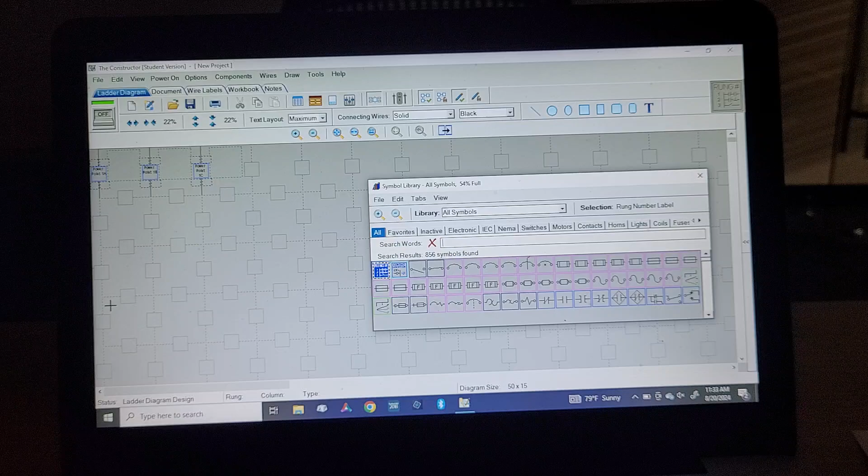All right, I'm gonna try to do this and hold the phone. If I was sophisticated, I'd figure out a way to record this inside the computer, but I don't know if I could get the audio to work, so I'm just gonna do it this way.

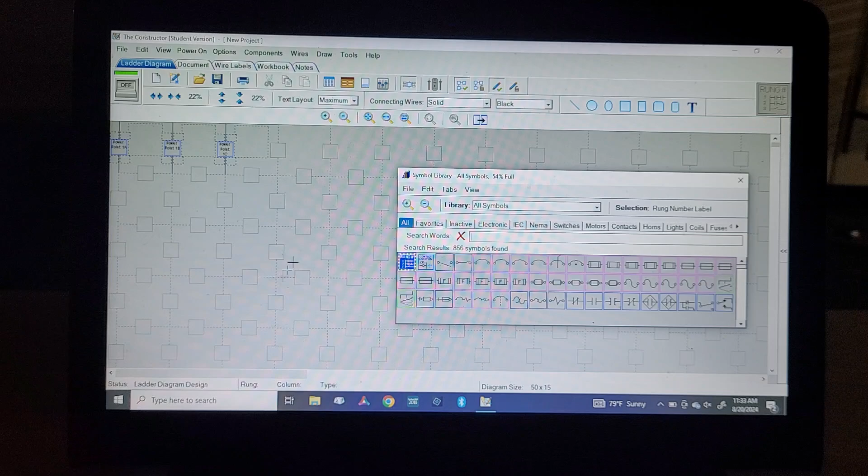But when you start up The Constructor, you get this little work pad here. You get your drop-in symbols, which are basically switches, and you get these little power points here. So if you wanted to, you could make a whole drawing with a transformer and all that good stuff, but I'm not gonna, just for simulating this part.

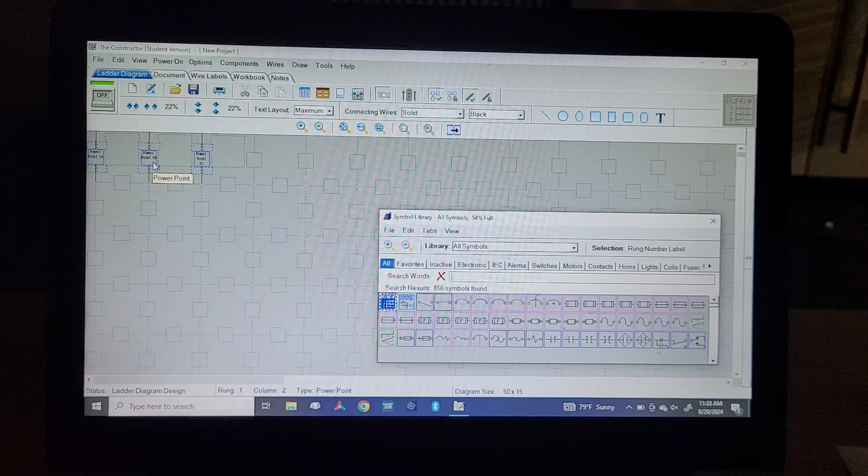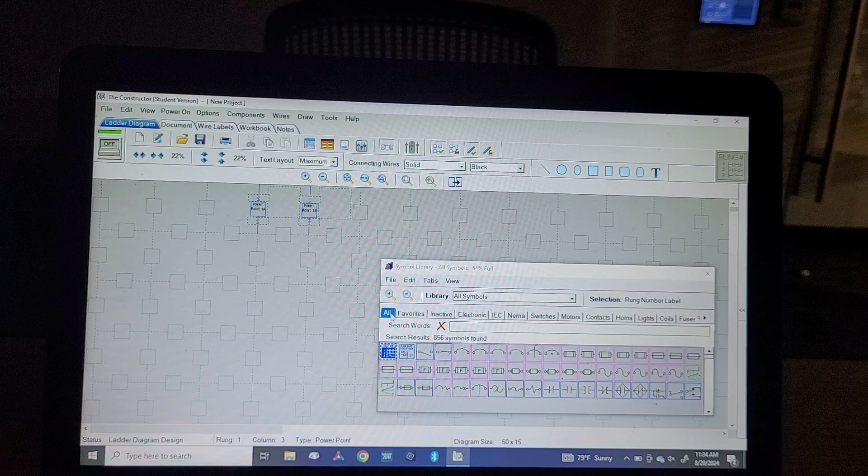So let's go to, where is it, PowerPoints, add single phase 2-wire PowerPoint set. Let's get rid of these. So I got rid of the 3-phase, now I just got 2-phase. So that's hot. I'll put the neutral, drag it over here.

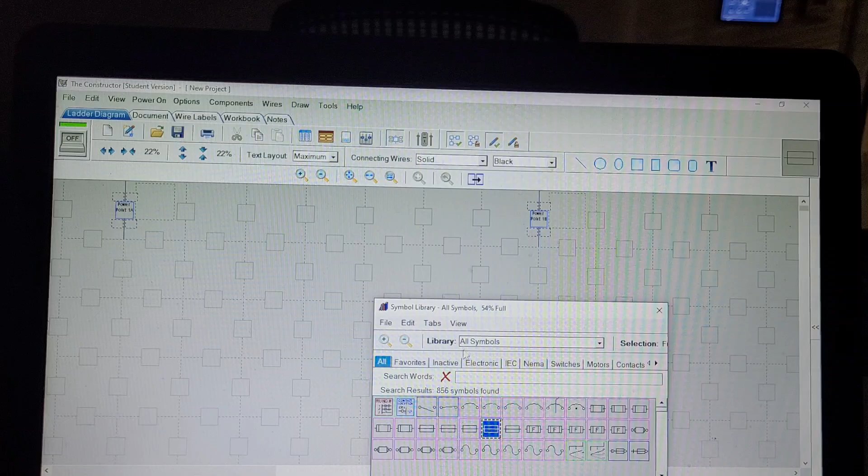So now I want to reproduce that drawing. So we need a normally closed pressure switch. So go in here. Everything that's kind of bluish here is an active switch. They do have inactive switches down here that don't do anything. Like, for instance, here's a diac and an SCR and different things. Triac, that's a MOV.

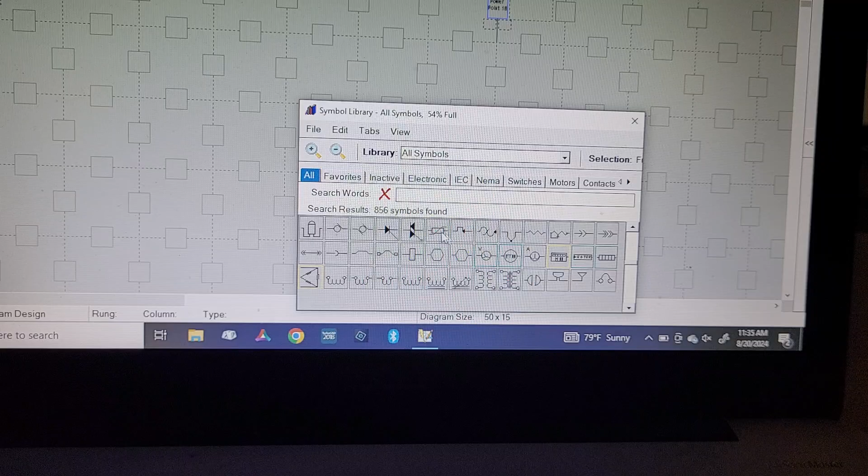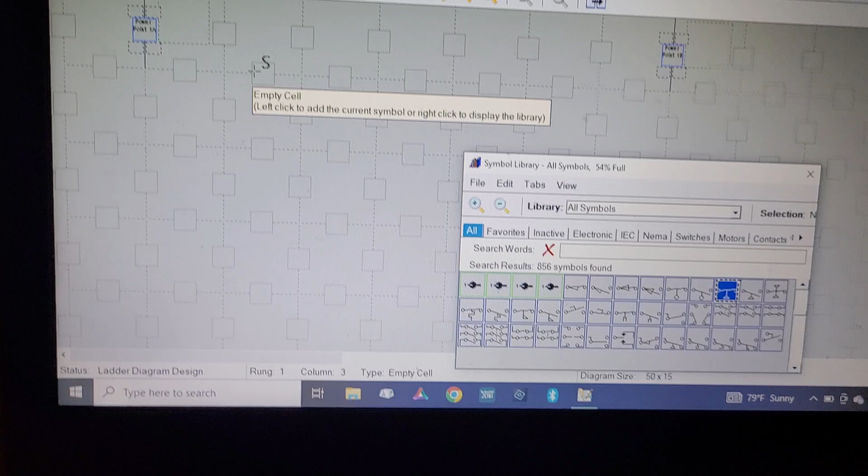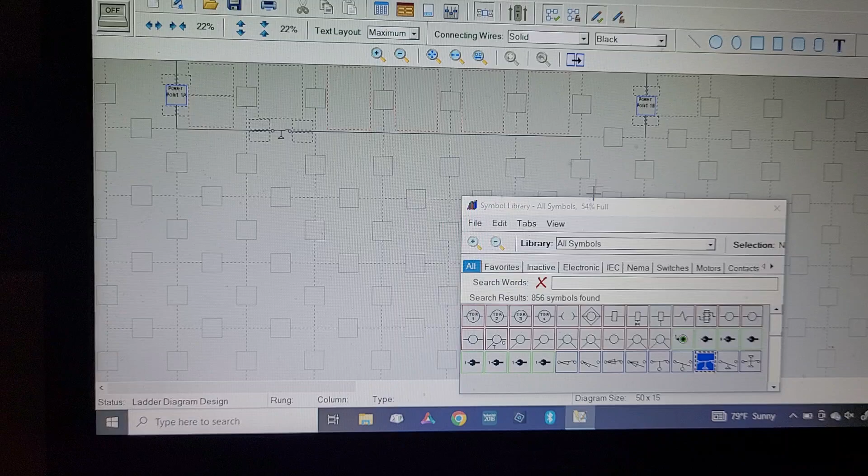Sometimes these are hard to find. It's got to be here. Yeah, there it is. We need normally closed. So you just drop that wherever you want it. We'll put it right here, and then fill that line in. Actually, we need a timer here. So let's put a timer in. We'll make it TR1.

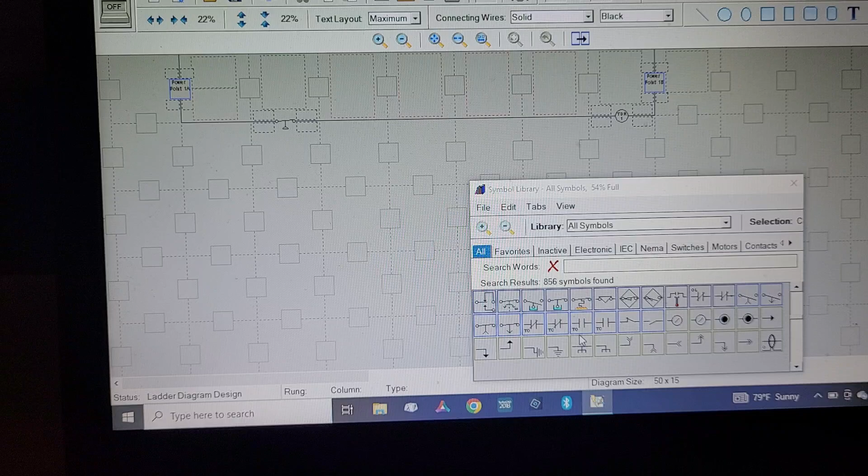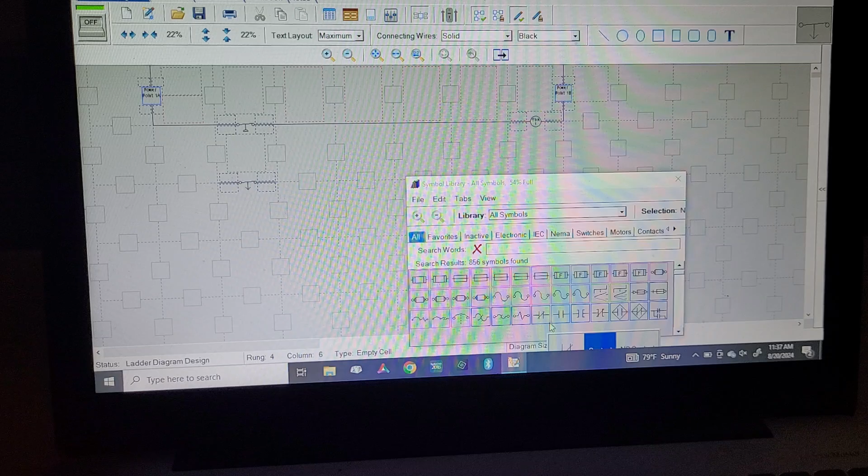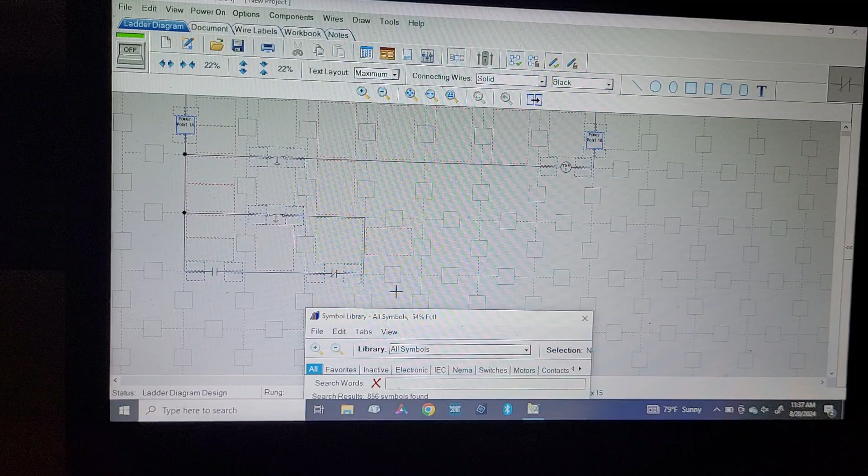And then we need off delay. Normally closed. And we'll put that here. And then we need normally open contact. Put that there. Normally closed contact. Put that there. Finish making the wire connections, and I'm just trying to make this the same as Leo's drawing.

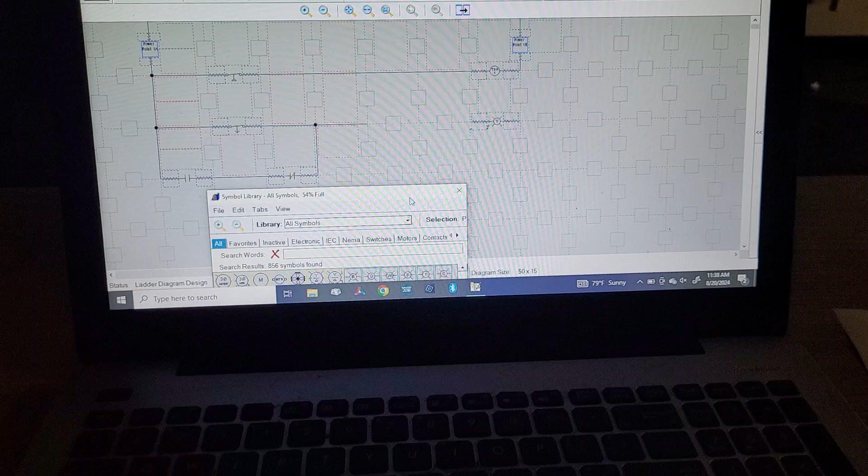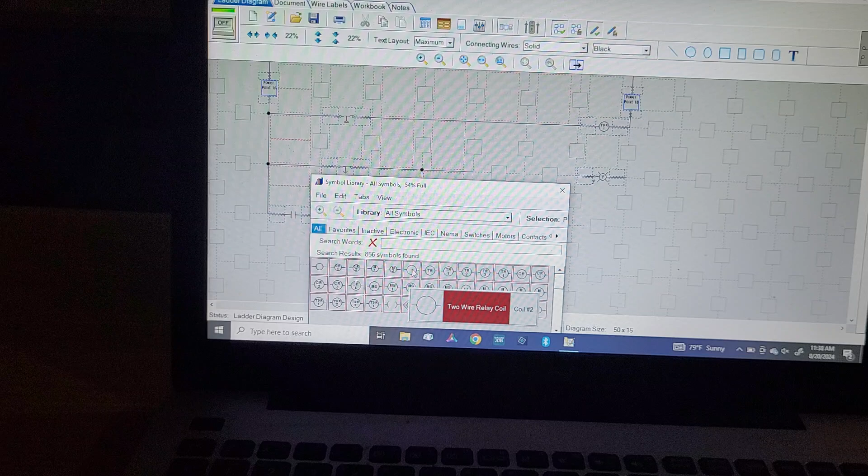We've got pilot light, and you can have these push to test. They've got amber, but for some reason amber doesn't exist. We got yellow, that's the closest thing. And then what do we got? AR1. And that's just a regular relay. So make that a control relay. Oops.

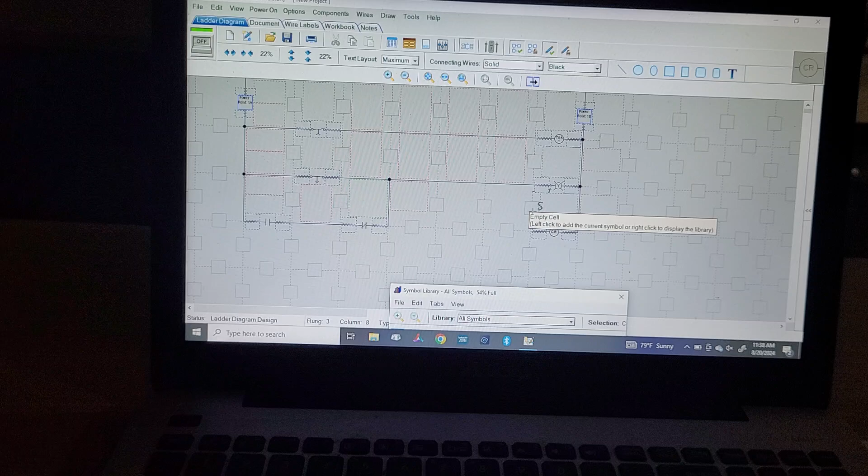Now, if you wanted this to push to test, you could put a power point here that would be connected from this hot. That's kind of suggested here by the little 01. That's where the connection comes from. They didn't want to draw a confusing set of lines, so that's just a power point. And you can do that. I won't put it in because we don't need it.

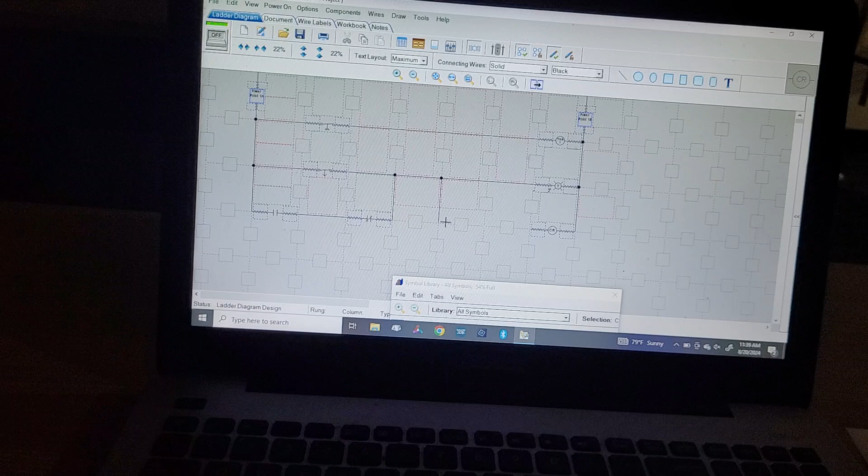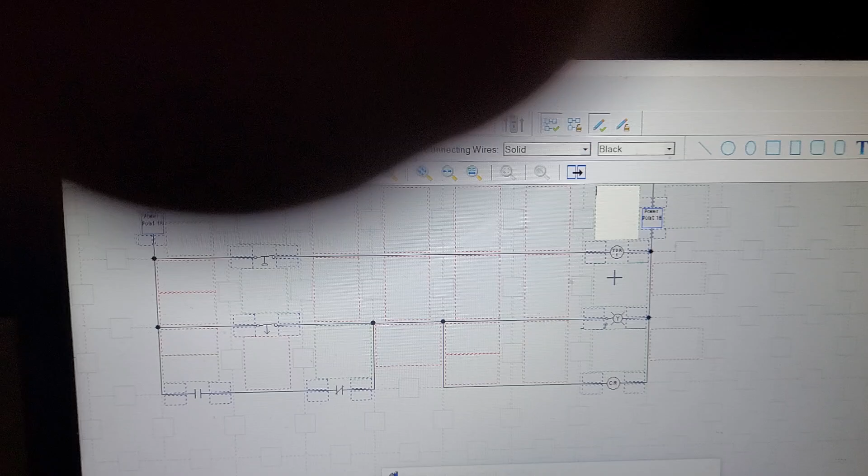Now, it helps if you give these things names. So this is, I'm sitting here in the dark, so bear with me, ATD1. So you can put the name up here in this little block. ATD1 right there. And then this control relay is called AR1.

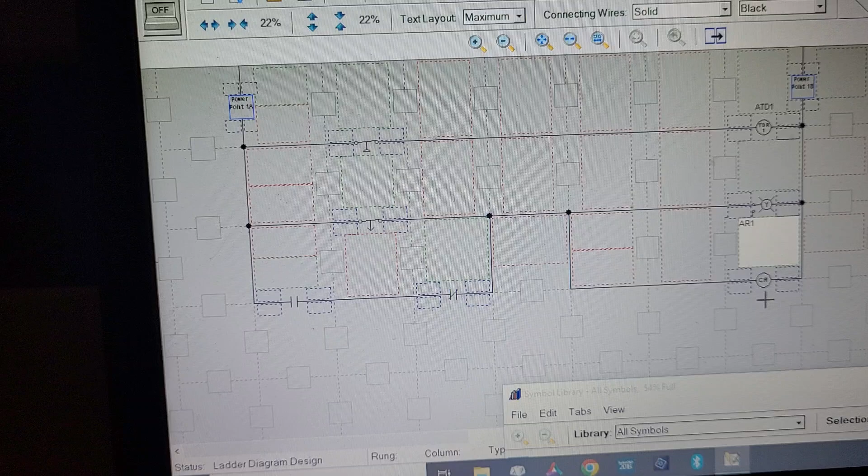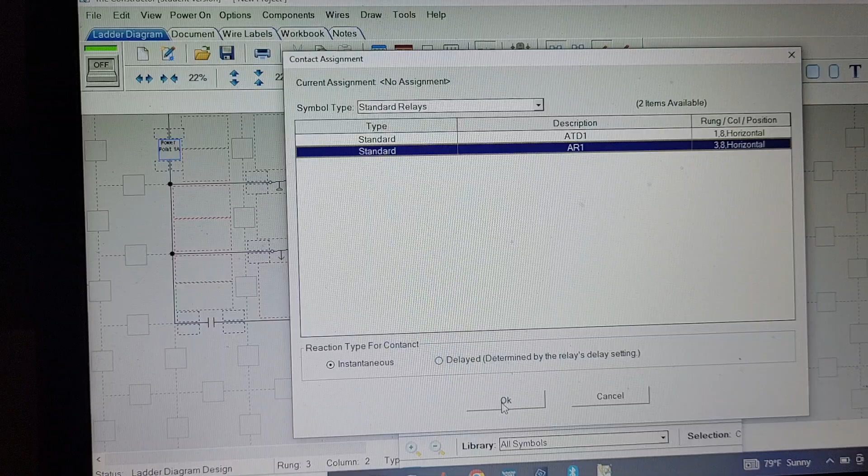By putting these names here, you'll see later that when you're setting values for these things, they'll appear in a list. So for instance, this contact is associated with AR1. So if I go to assignment and I pick AR1, it's an instantaneous relay. So it's going to automatically put the name AR1 here, and it turns a little red color with a number 1 to let you know that this is associated with this. So anytime this energizes, this is going to close.

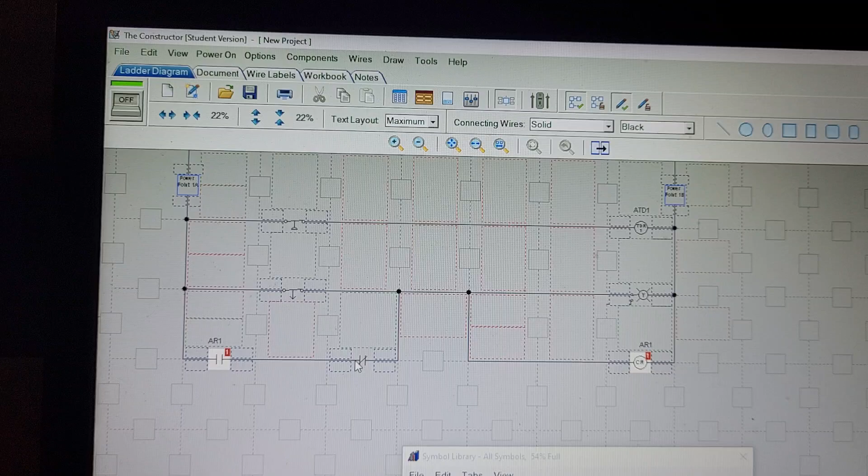And then we need CR5. We're not going to worry about connecting it to anything. We're just going to close it by hand to simulate it. But you could, if you wanted to, have a push button connected to a CR5, but I'm just going to give it a name. And then this is ATD1, so let's give this assignment ATD1.

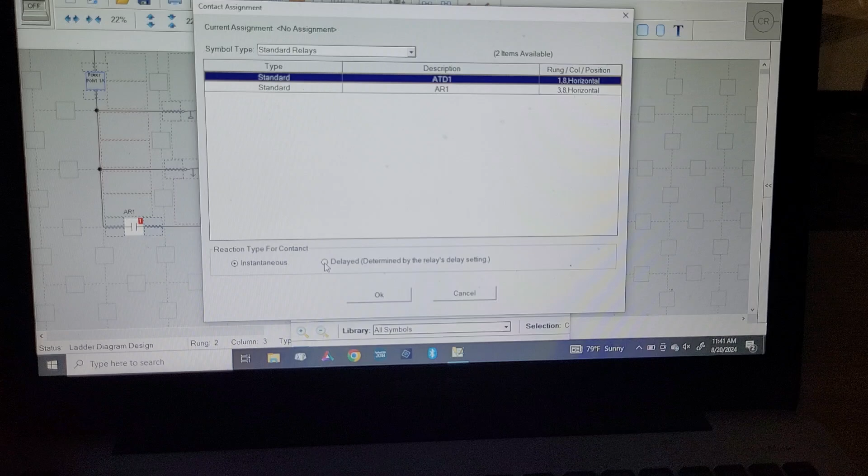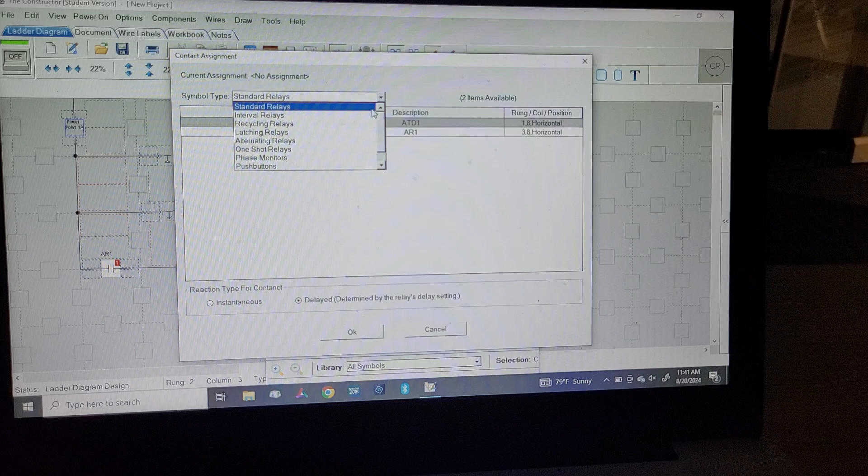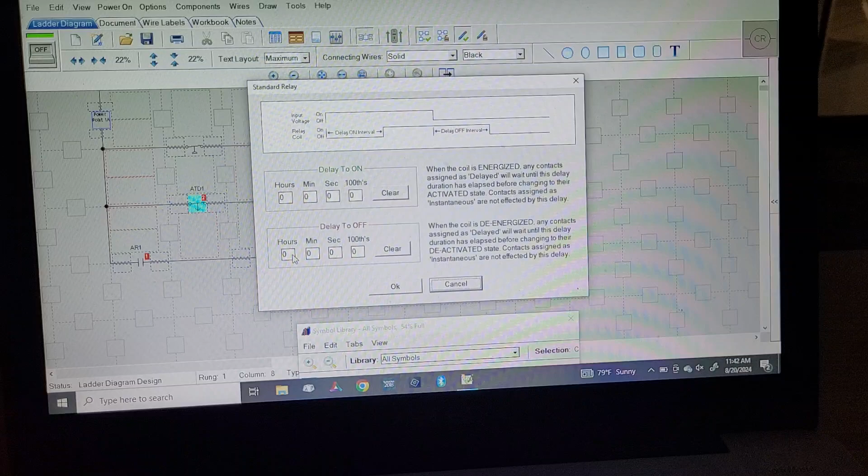And we need it delayed, and we're going to make it, give me a second here. So you get interval relays, recycling, latching, alternating, one shot, phase monitors, and push buttons. But that's not what we wanted. Delay settings. So you have to go to the coil itself to change the delay settings. So I want this an off delay, and I think this called for 30 seconds, but I'm only going to set it for 10 seconds. So we'll make that 10.

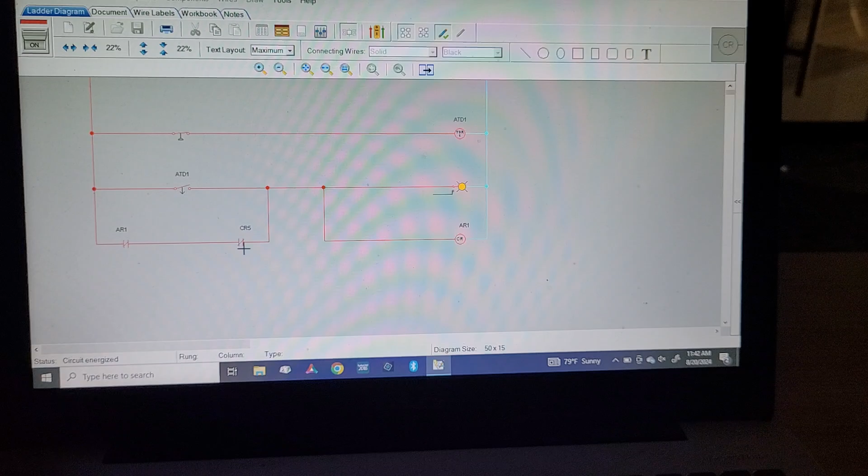Okay, so we got a little breaker up here. And I don't have the speakers on, but it actually does make a sound when you turn it on. So we hit our reset button just by opening this. Okay, it's closed again. And then if the pressure goes high, it starts counting. Boom, there's our yellow light. So give me a second. I'll upload this and then I'll post another one with the correction in it.